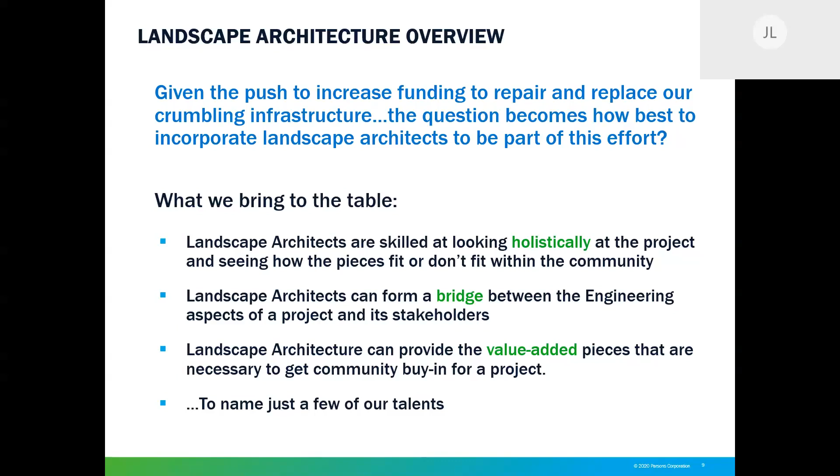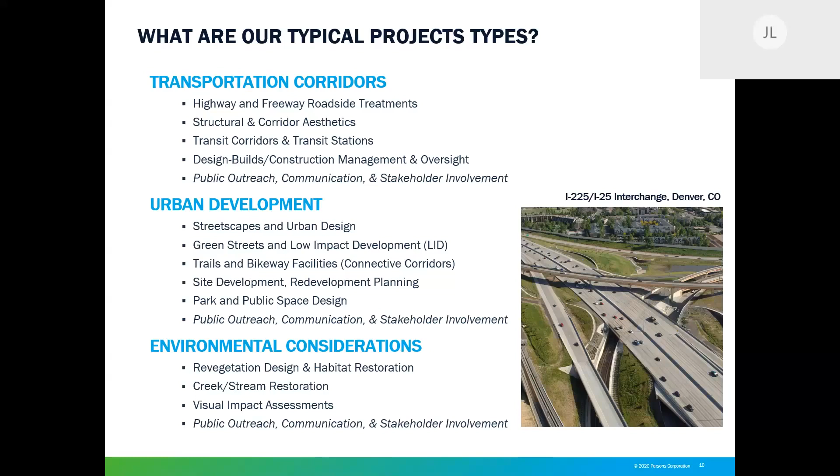So what are our typical project types? A lot of what we do is transportation corridors, and that's highway and freeway, and that's roadside treatments, and structural and corridor aesthetics, but also transit corridors and transit stations. Design builds and construction management and oversight has been a large piece of what we have been doing for the last 20 years. But in urban development, we look at streetscapes and urban design, green streets and low-impact development, trails and bikeway facilities, site development, redevelopment planning, parks and public spaces, and environmental considerations, revegetation and habitat restoration, creek and stream restoration, a similar topic, and visual impact assessments is another big part of what we do.

The where of Parsons landscape architecture. So where are our projects? Where have we done these treatments and these designs? We're going to go through some of those categories that we just talked about, and we'll talk briefly about some of these projects.

But also, structural and corridor aesthetics are an increasingly large part of what we do. If you think about a highway or freeway going through a community that's going to be widened or improved, the elements that go in with that, in addition to widening of the pavement, are the bridges, sound walls, and retaining walls in those structures.

Given that freeways and highways have really become the main streets, it is how a lot of people interact with the community, or not, depending on the corridor, because if there hasn't been care taken into the aesthetics, it's just a pass-through. These elements are how a community can express itself to people traveling on that main highway. This is who we are, and it's a really good opportunity to put the context of the community out there for people to see.

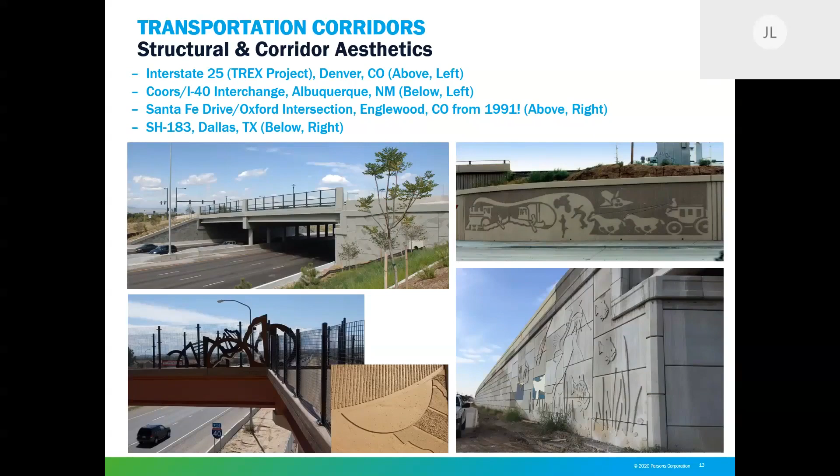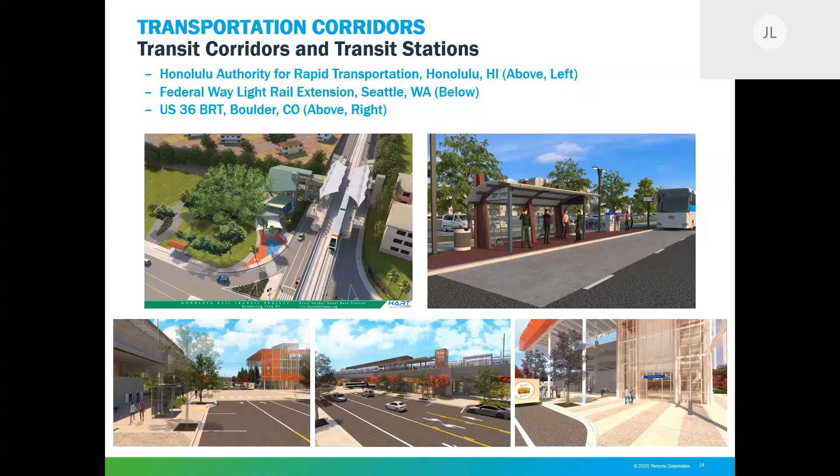Design, build, and construction management and oversight. As I said, this has been a big piece of our work over the last 20 years, and we work on both sides of the equation. We can work for the contractor, as we are on HART and the Federal Way project, or we work for the owner as an owner's rep to ensure that the contractor is meeting the requirements established in the contract.

Because landscape architecture and design builds, we have to take a little more care in presenting to the contracting teams that are bidding exactly what they need to include in their bid for landscape and aesthetic requirements. To some extent, aesthetics and landscape are in the eye of the beholder, but we have to establish what the requirements are by working with stakeholders and owners to produce that. It's not like some of the other disciplines that have established requirements for roadway widths, lane widths, safety, and those elements. We don't have that nearly as much with landscape architecture.

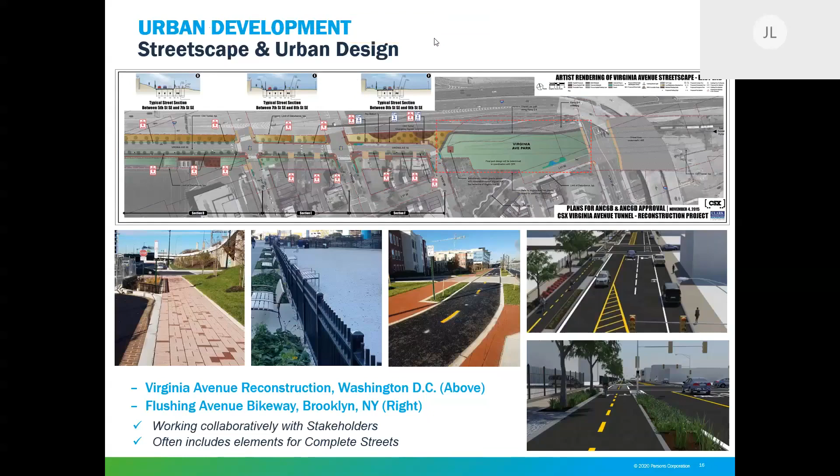In speaking about streetscape and urban design, as Jeff was saying, there's a whole array of different materials that need to be looked at very carefully to be able to integrate them and ultimately provide a more holistic design.

I just saw the slide move. I'm wondering if Jeff is back on for us. Jeff, are you there? I think he's still trying to resolve his issue.

So really, when we come to these kinds of projects, a lot of times we find ourselves brought in at the last stage. The transportation engineering is done, and they bring in the landscape designer to put in the plantings and pretty much call it a day. Really, the services we provide for these kinds of urban designs, and what you're seeing right now are green streets, which I'm sure Jeff will jump into in a bit, encompass a wide array of really in-depth details that we need to be involved in from the beginning in terms of the choice of materials, color palettes, different types of amenities associated with the design, to avoid it being broken up with different elements plugged together. You want to have a holistic design, especially when you're designing complete streets.

That integrates your lighting, your street amenities, your barriers, you name it, and ultimately also the planting. It's not a question of going out and finding something that flowers at a certain point of the year and that's it. More often than not, we're really driving those designs to the next step and looking to see what are the most sustainable plants we can choose, what plant palette can we take from for maintenance plantings, reducing the requirements of maintenance, reducing the requirements for irrigation in many cases as well, and how can we ultimately make these planted areas more sustainable in the long run and more durable given the harsh conditions you would often find in an urban area. So those are all considerations that we bring to the table.

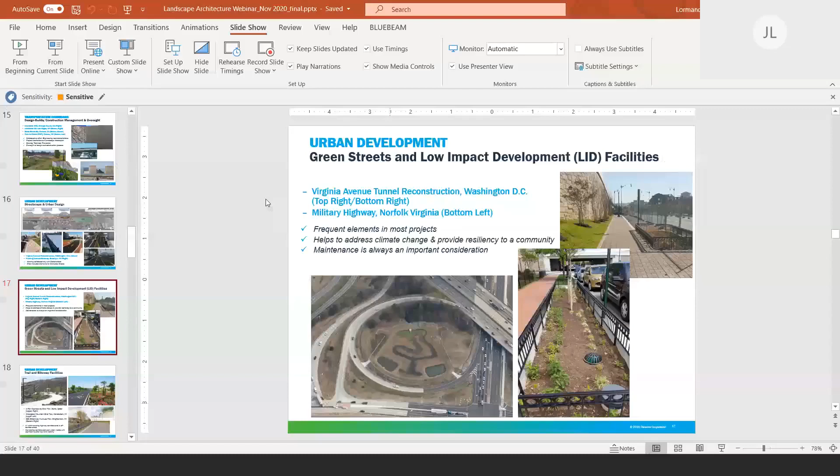I was just telling the group about all the different aspects that we bring to the table when designing complete streets and green infrastructure, that kind of thing, and that at times we're brought in at the end of the project. Being integrated early on really drives to more holistic design, and more often than not, cost savings as well, and saving having to rework design items that hadn't been considered earlier on by the transportation engineers and so on and so forth. We really benefit from being involved from the beginning.

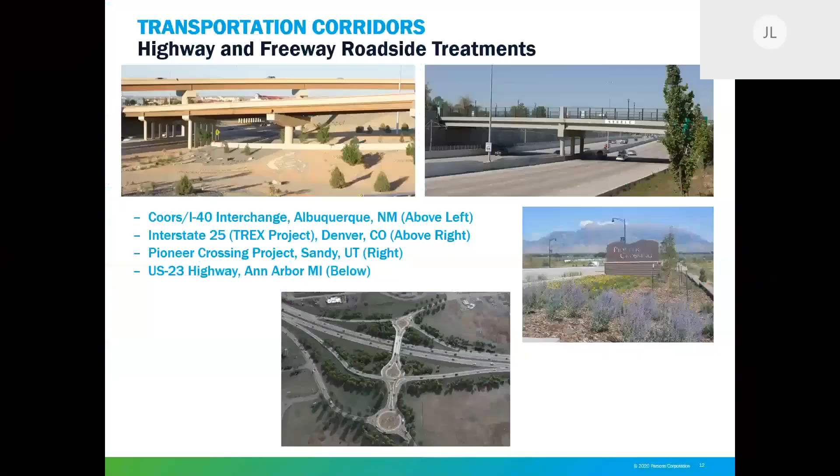Okay, well, all right, is that better? It's a little better, yeah, I could see you. Okay, all right, sorry everybody. AT&T is my best friend right now. It's not.

Green streets and low-impact development facilities. So often as part of the streetscape that we were just talking about, low-impact development is often included in that nowadays, where we are looking at doing something with the stormwater to create microbasins, to get greater percolation into the groundwater and reduce the amount of water going into the storm sewers, reducing the stress on the storm sewer system. And so that also involves a lot of streetscape elements.

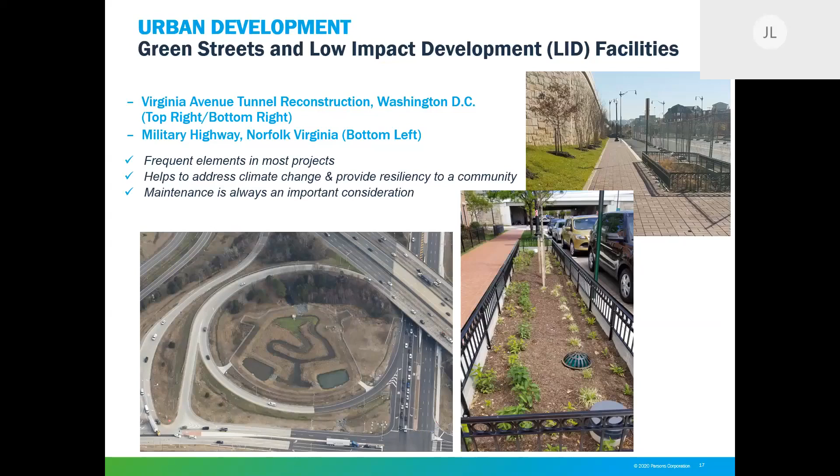So what do these microbasins look like? What are their plantings going to look like? And railings to protect so people don't fall into them. So that they all become part of the streetscape elements of the project.

Trails and bikeway facilities. These are some of our recent bikeway facilities, including the Amargosa Mountain Bike Trail, which went up the side of Black Mountain in Henderson, Nevada, which was a pretty good clip for the temperatures that you have in Nevada, but I think a lot of people have used it and enjoyed it. The Al-Kor Expressway Bike Trail in Doha is quite a feat. It is a high-speed bikeway, and it covers 50 kilometers, and was actually an award-winning project for being one of the biggest, longest high-speed bikeways in the world.

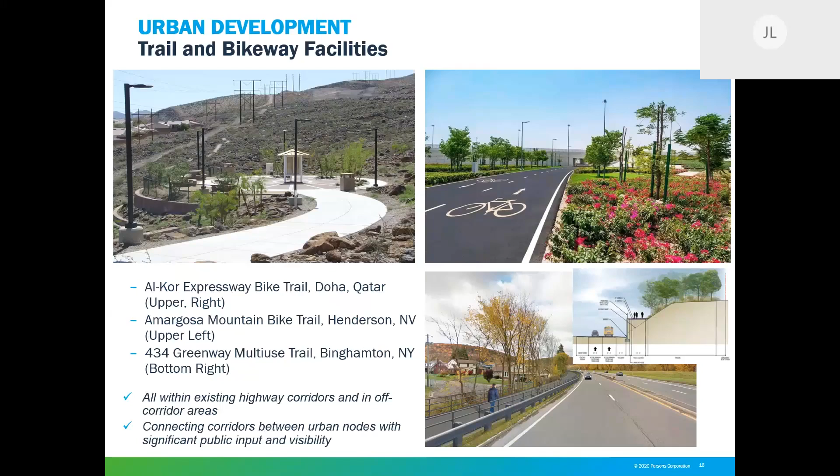So these bikeways can be in or outside the corridor. You have the 434 Greenway Multi-Use Trail there, and that's within a roadway corridor. Part of the trick with that is, one, you have enough right-of-way to do that, but two, you keep the safety of keeping people off the roadway. Those are all elements that are included in that design approach.

Site development and redevelopment - these are a couple of really interesting projects that we were involved in. The Ministry of Housing project in Saudi Arabia - I personally spent 7 months in Saudi Arabia, as did members of my team, where we were developing master plans for 11 communities across the kingdom, and master planning how the housing and the blocks all worked with the parks and the schools and the commercial areas and the mosques, and how that all came together to create these communities.

The other project on this board is a really interesting project that Parsons did as part of it. It was a pro bono project out in Fort Irwin near Barstow, California. Believe it or not, Fort Irwin has the iconic fire truck from 9/11, the one that was driven up onto the rubble during the rescue and recovery period. That fire truck was eventually going to be sold as scrap, and the fire chief in Fort Irwin raised the money to buy the truck, save it from scrap, and bring it out to Fort Irwin. So what we were responsible for was coming up with this design for a memorial that had the fire truck as the keystone element.

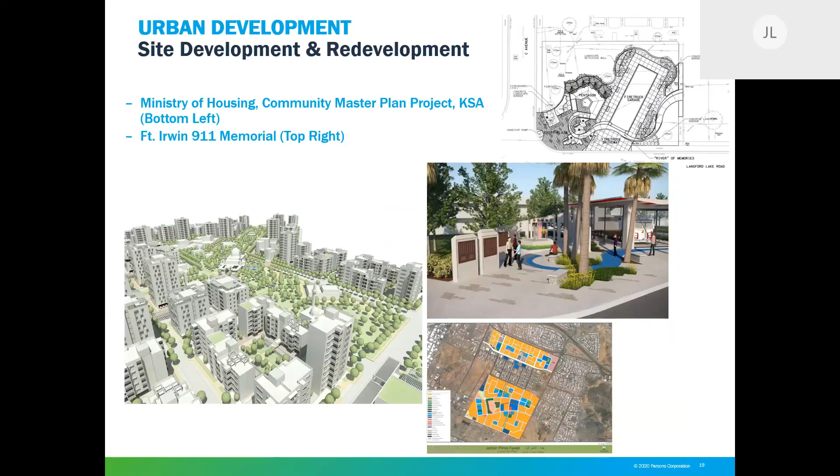Parks and recreation facilities is another big part of what we do. The Robert Moses Parkway removal is probably one of the larger ones that we've worked on. This is on the banks of the Niagara River, and it involved the removal of a 4-lane high-speed parkway through this area and a large bridge overcrossing, and then revegetation and renewal of the area.

Originally, with the parkway in there, this is in Niagara and very close to Niagara Falls, and there was just a disconnect between the river and the community. This parkway removal and putting this park in here sort of reconnected the community to its river.

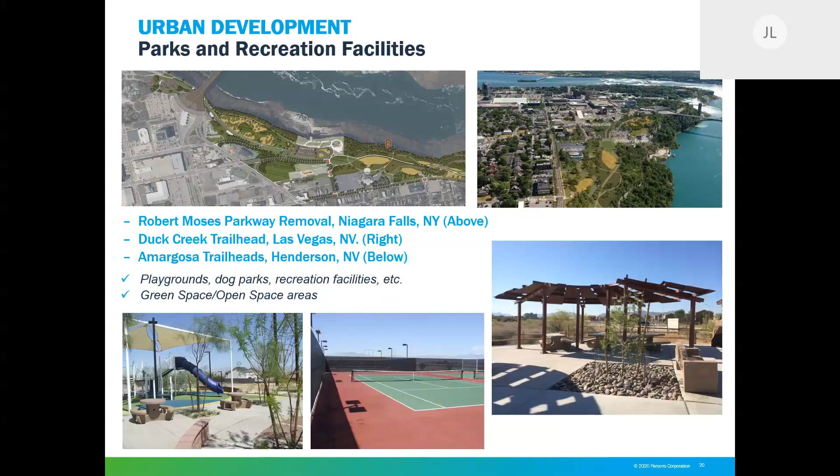But also smaller facilities, picnic facilities, recreation facilities like tennis courts, soccer fields. We've even designed a disc golf course and playgrounds.

Revegetation and native habitat restoration. Now, we've been talking about these projects as sort of individual—on this project we did this, on this project we did this. But in reality, a lot of this all folds together.

Like previously, where we talked about the transportation corridors and the roadside treatments and the structural aesthetics, that's a treatment for one project corridor. Revegetation often falls in that as well, where depending on where the roadway is located, the emphasis might be more on revegetation and native habitat restoration on the outside of the roads than it is for classic urban design parkway kind of treatment. So we do a lot of that.

One of my first projects for Parsons was the Provo Canyon Parkway in Provo Canyon, Utah, where we had 91 acres that we had to reestablish a native habitat on after all the work was done.

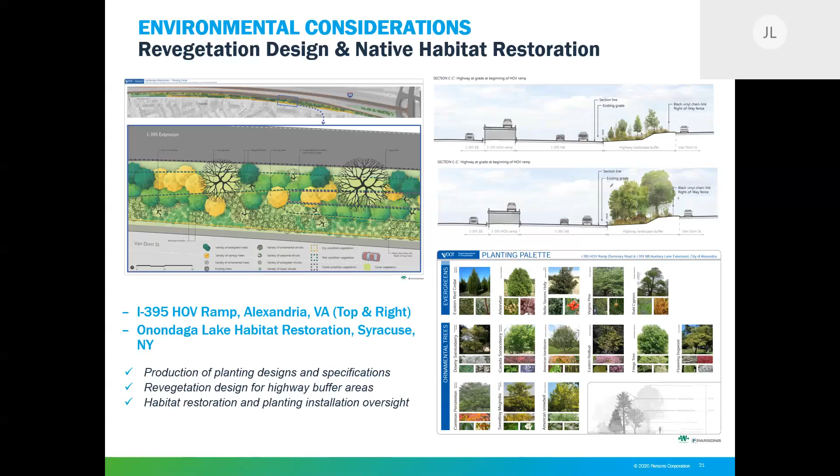One of the big projects where we've done that is the Lake Onondaga habitat restoration, and Natalia is going to talk about that in a little bit, more in depth.

And something similar to that is stream restoration, where you have to repair degraded stream banks and things like that. The photograph you see there is Clear Creek along US 6 in Colorado, in the Colorado Mountains.

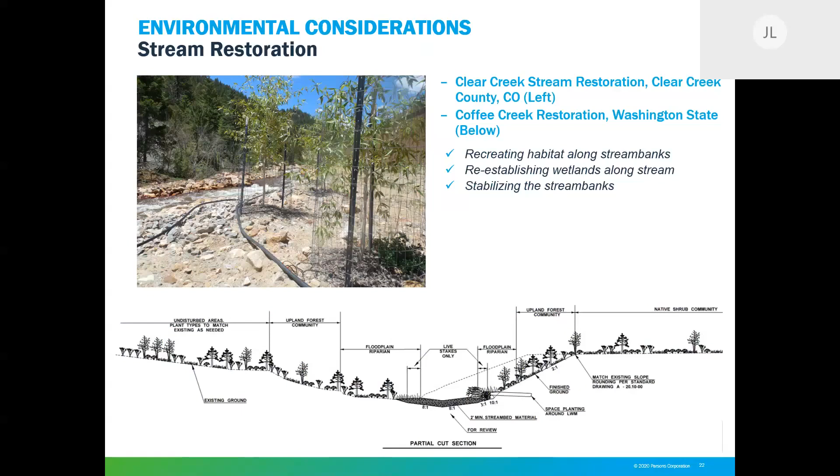In that project, they were doing some tweaking to the roadway, but there was also a lot of mine tailings along the banks of the creek, which were leaching into the creek. So they had to reestablish a natural flow to the stream, get the mine tailings out, and reestablish a natural habitat to it.

Visual impact assessments are part of an environmental impact assessment, an environmental impact statement. This is one of the reports that goes into it, and we've done a lot of these as well, particularly in California.

But this is an opportunity—I look at this as really an opportunity for us to help explain to the public just what they're going to see with the new project. We usually evaluate alternatives, but this shows what you're going to see with these alternatives, so that they can make an evaluation themselves if they're very concerned.

The bridge you see there in the upper left, the existing bridge, is an iconic bridge. This is over the Los Angeles River. It's a historic bridge—it was in the movie Grease. The Los Angeles River is a concrete channel there.

And that's where the drag racing scene went on in Grease. When we were working on this analysis, I swear this bridge was in every car commercial on TV during that time.

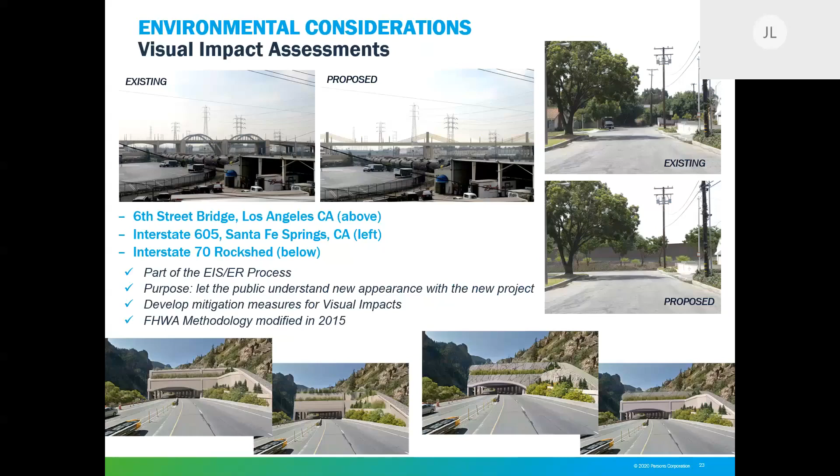But the bridge had major structural issues, and so it had to come down despite its historic nature. We had to explain to the community: these are possibilities. This is what you might see with another iconic bridge—not the same one, but a different iconic bridge—so the public has an opportunity to evaluate what the changes are going to be to their visual environment.

The who of Parsons landscape architecture—who are we? Landscape architecture has been part of Parsons for at least 46 years that I know of, beginning with the Glenwood Canyon project in Colorado.

We have grown since then. At that point, it was one person, and since then we have grown to a staff of 9, primarily a core staff of 9 in the mobility solutions in Parsons Mobility Division, with additional resources in other divisions that we'll talk about in a sec.

So there's me leading the Mountain and West region, and the Eastern Central region led by Norman. But what's really important to understand here is that we're one team. We share work back and forth, and it can make for a very productive use of time.

As an example, Matt Scholl is in Charlotte, North Carolina. He was the lead designer for the stations on the HART project we talked about a little bit ago.

He's 2 hours ahead of Denver, so he would start his day and start on the station designs. And when his day was over, we'd be able to pick up and finish. In Hawaii it's 3 to 4 hours, depending on time of year, from Denver, and we would be able to get the project to them on time. So it works out really well. We're doing something similar on the Federal Way project, where Norman is leading some of the station plaza paving, but we have people in Denver working on it as well.

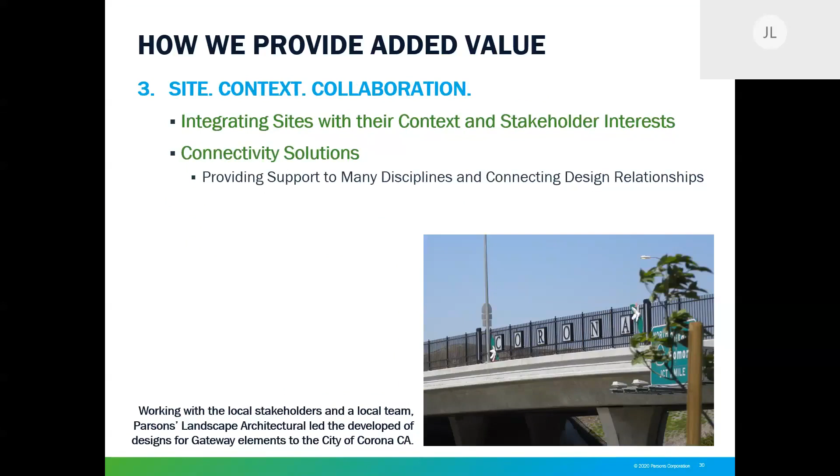Our bottom line is benefits to the client. It allows a more direct link between engineering teams and the project's landscape and aesthetics. Often landscape work is given to DBEs, but it's very helpful to have Parsons Landscape Architects as oversight, or depending on the workload, since DBEs tend to be small, it's good to break out pieces of the work and keep it within Parsons, because you have more functionality between the disciplines within Parsons.

I'm running out of time here, so I'm not going to go through all of these, but we can bring a lot to the table with our experience, what we've done, and our knowledge, and it really would be a benefit to the projects to have us involved.

So I'm now going to turn this over to Natalia, who will go through an example project of added value and extension of services.

Thank you, Jeff. So I'm going to showcase one project a little bit different from the transportation corridors we've been seeing, although we have shown other examples along the way as well — more related to a project with a very strong environmental component.

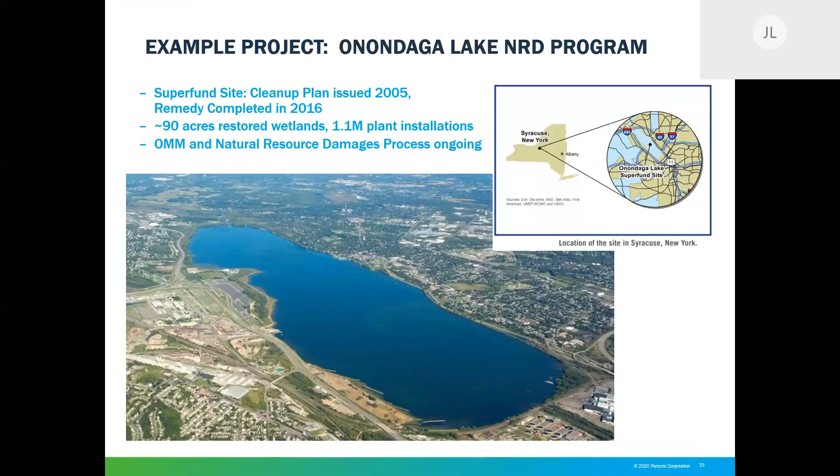Now that the remedy is completed, we've been involved in the NRD, the natural resource damages portion of the project, which is the phase we're in right now. So what is NRD?

As the remedy was reaching completion, discussions were being held between the U.S. Fish and Wildlife, New York State Department of Environmental Conservation, our client, and also the local county, looking to achieve a settlement for natural resource damages. We reached that settlement in 2017, straight after the completion of the remedy, and it equated to a program of 19 projects, some associated with habitat restoration and some with increasing recreation opportunities.

This type of process is usually resolved over many, many years. Our landscape team's involvement came in early on, helping provide conceptual designs and visualizations such as the ones you're seeing, where we helped the stakeholders and trustees visualize what the concepts and proposed ideas were. This drove ultimately to quicker agreements.

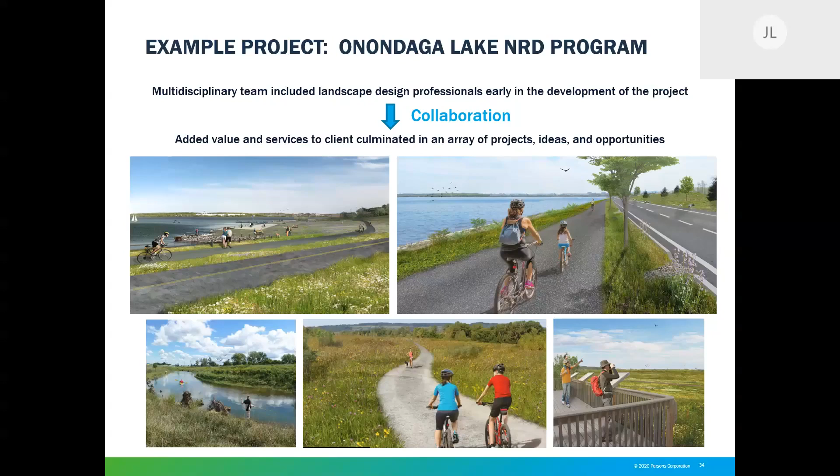We got the trustees excited about these projects, and we were able to quickly shift from discussions on damages determinations to an active selection of projects and a path forward focused on compensation to the public and the environment as opposed to damages. We got buy-in from both the trustees and the clients early on, resulting from strong collaboration throughout all of our multidisciplinary teams and our landscape group.

Of these 19 projects, half were focused on habitat improvements, the other half roughly on recreational improvements, varying from habitat enhancements, living shoreline designs, public fishing rights and access, boat launches, fishing piers, trails with overlooks, resting areas, and a whole wide array of different types of projects.

Initially the client involved us early on given our involvement in the remedy, to help aid them in discussions and negotiations. But given the success of the story, and as the client started seeing our capabilities consulting on design details, we were able to get their buy-in early on these projects, and ultimately ended up performing the designs for a lot of these projects, which ended up turning into design builds for Parsons as well.

It's a great success story on our end, as we were able to further show them our capabilities that went beyond the technical remedy. This array of concepts and ideas integrated into a very project-focused process, which required very heavy communication and visualization needs, and that's where our team really stepped in to help drive the project and conceptual design, and ultimately influence decisions between the trustees and principal parties, increasing overall cooperation between all groups.

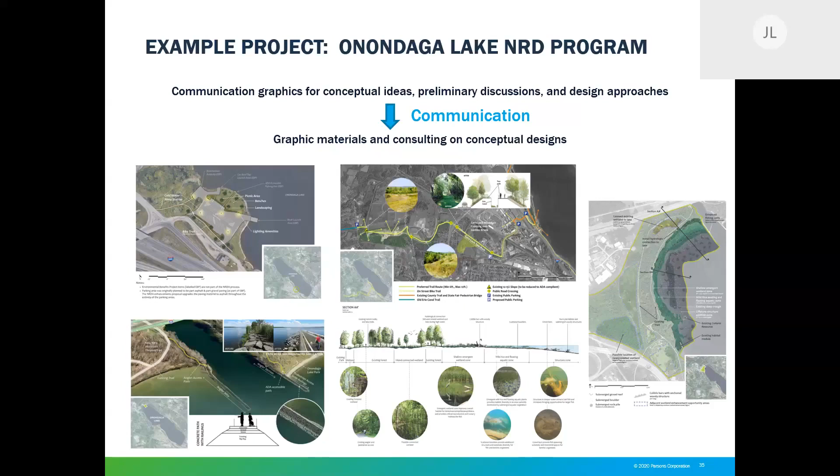Once we got through all the conceptual design, we started thinking about implementation, and our role didn't stop there. We had already been involved in the remedy and oversight of some of the habitat components of the remedy and post-construction monitoring work as well.

As these projects came to fruition, we were able to further provide consulting and help on plants and design details, then quality control and quality assurance on planting materials and plant installations. We also consulted on aesthetics and materials for access paths, barriers, and signage, consulted on visual impacts along those public trails, and collaborated with transport engineers exploring different trail layout alternatives and preliminary details.

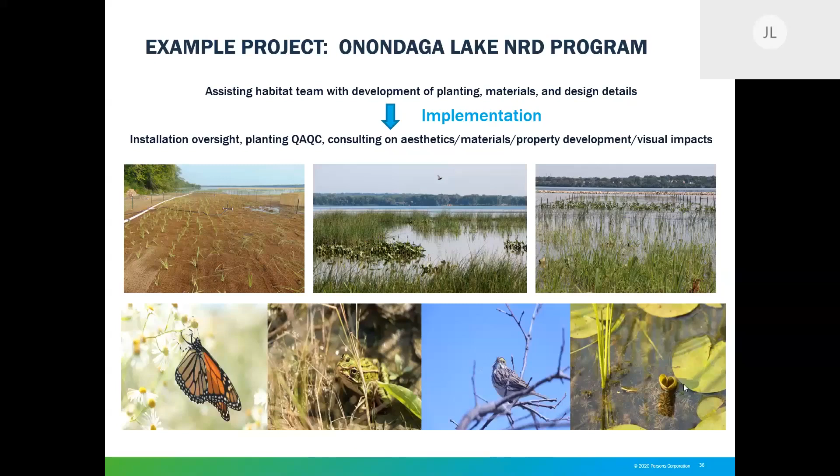We also proposed potential future uses for these properties and opportunities for site development, which was a big interest for clients as well. Ultimately, we were providing direct benefits to our clients, better choices on materials and native plants, and awareness of potential issues, because we were so aware of the scope, needs, and requirements set by the trustees. We were able to bring awareness early when necessary if there could be a potential issue down the road, and ultimately provide true cost savings and higher efficiency by having all these capabilities in-house as opposed to coordinating with multiple subcontractors.

And so I couldn't let this pass without touching on outreach as well. We supported our clients in their own outreach program and events, but we also, along the way, produced such an array of graphic material that we really could capitalize on that and use it for multiple venues.

community buy-in and communicate the advancements of the project and the next steps through the NRD program. We also were able to capitalize on a lot of these graphics for awards and publications, and having us involved in many of the phases of the implementation as well, we were able to take key photography, which was used for outreach opportunities and also publication and communications for the clients.

So, more often than not, we have our technicians who are focused on the active work and daily reporting, and we really miss those key shots that really sell our projects and show our capability. So our team was very involved in making sure that we documented the site appropriately for outreach as well.

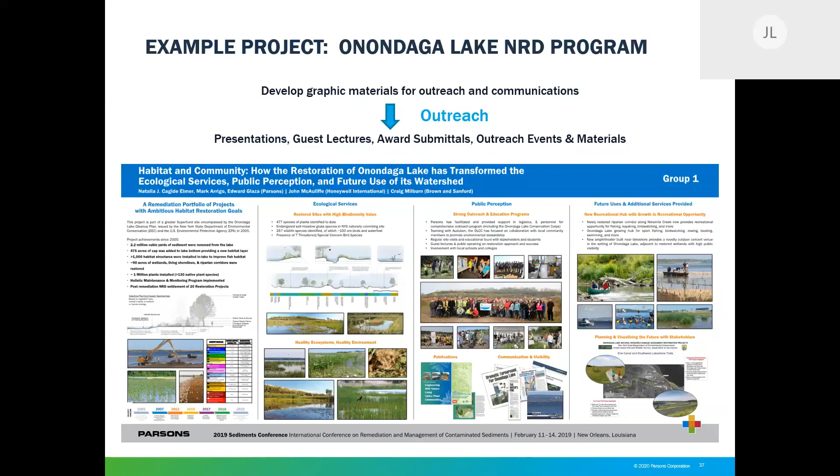So on a side note, before wrapping up, I did want to note that outreach goes beyond this project. Our clients continually need more and more extensive support when it comes to communications with the public and selection of materials, graphic materials for communication. And we're not talking only of private clients, but also regulators.

Overseers, more often than not, need that extra support to be able to communicate with the community who are concerned about these sites and to be able to give them that positive message and ultimately drive that success and positive public opinion on many of these sites.

So moving on to conclusion and wrapping up all of these ideas that we've been sharing with you all today, we wanted to, at the end of the day, drive that the Parsons landscape architecture teams truly do bring a whole array of added services to our clients and ultimately added value to Parsons.

Following our enhance, extend, transform growth strategy, we enhance our teams by increasing the diversity of our knowledge base. We end up with stronger teams that drive a much better bottom line with all of our in-house work. We extend our capabilities, working with our stakeholders, working with our clients, providing added services, and ultimately driving better solutions.

And we transform the projects, providing better designs, context-sensitive solutions, sustainability-focused approaches, and we differentiate ourselves that way from others. We provide direct benefits to our clients, providing this expertise early on in the process and ultimately providing better solutions to them. And this, of course, ultimately drives project success, which is what we all want, of course.